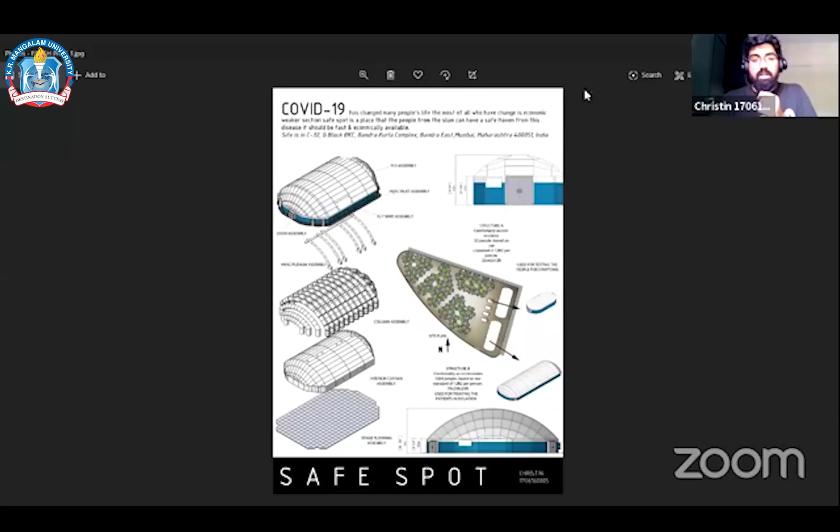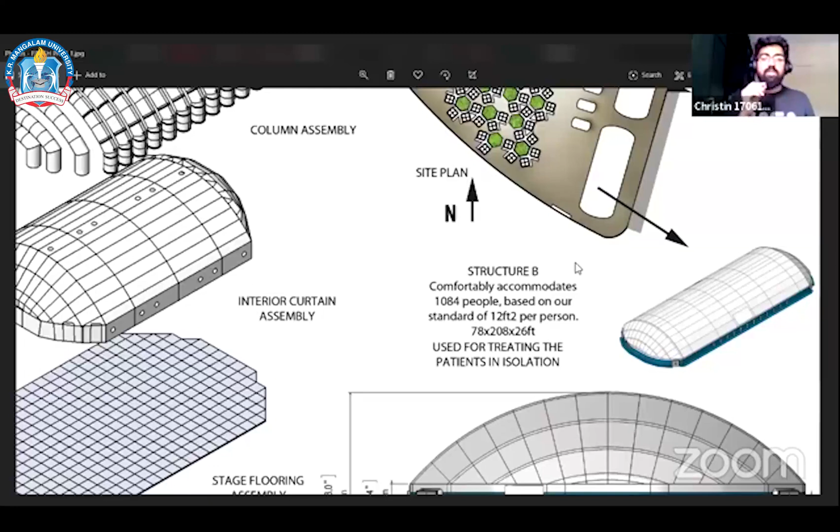This particular structure, structure B, was created based on places like Air Force areas. It is a structure for hangars where planes come from, where planes are kept and used, and engineers work on it. And I transferred them into isolation chambers for people who are infected or tested and waiting for their results, so that they can get into the building.

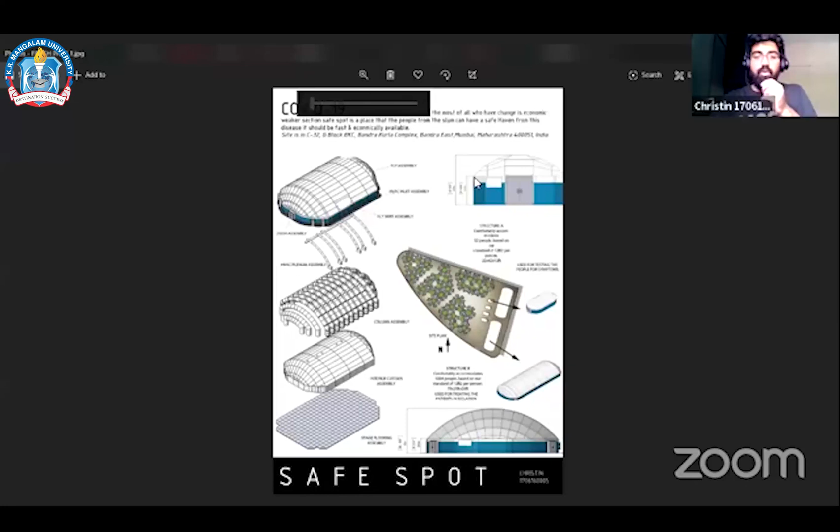I didn't have the opportunity to work inside such buildings, but I worked on another project, my residential areas. I have to say that these people don't have breathing spaces in between the buildings. So what I have done is create a courtyard and breathing places so that air can come through the buildings and between the buildings and go through the courtyard so that there can be ventilation in between. I have made a crisscross of towers in which there can be gaps in between, so that air can come through, and placing it horizontally is to create interactive spaces so that they can interact with each other within their homes as well.

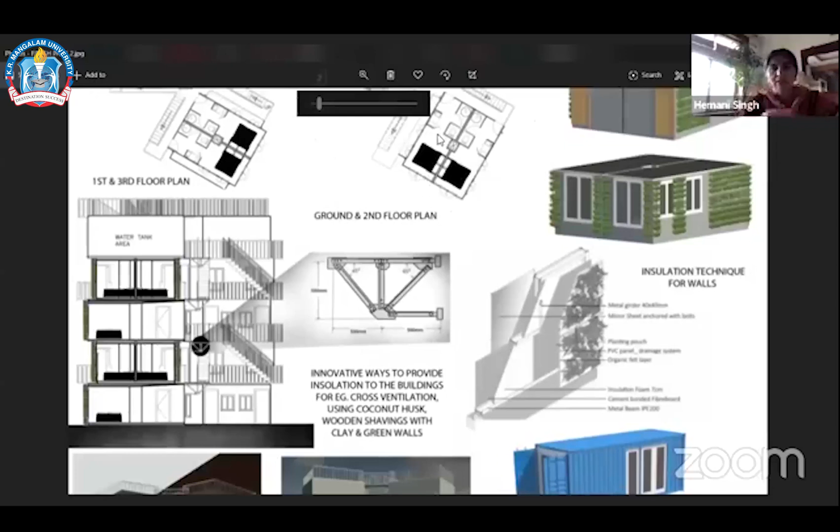Yeah, that's very good. Do you want to go on to explain the containers that have been put to use? The main problem is I should create a structure that is readily available, faster to create, and needs the least amount of effort.

So Dharavi is already near to a lot of shipping containers, so I tried to construct a building with shipping containers because of that. I've stopped myself from doing anything other than shipping containers.

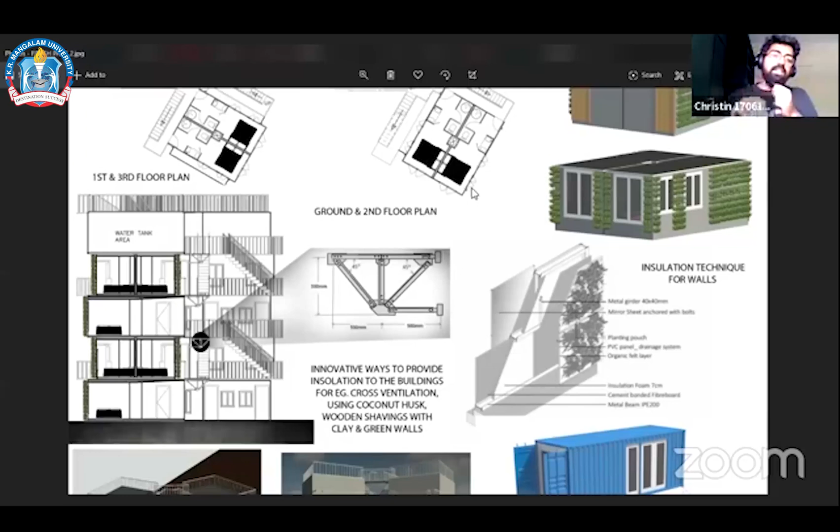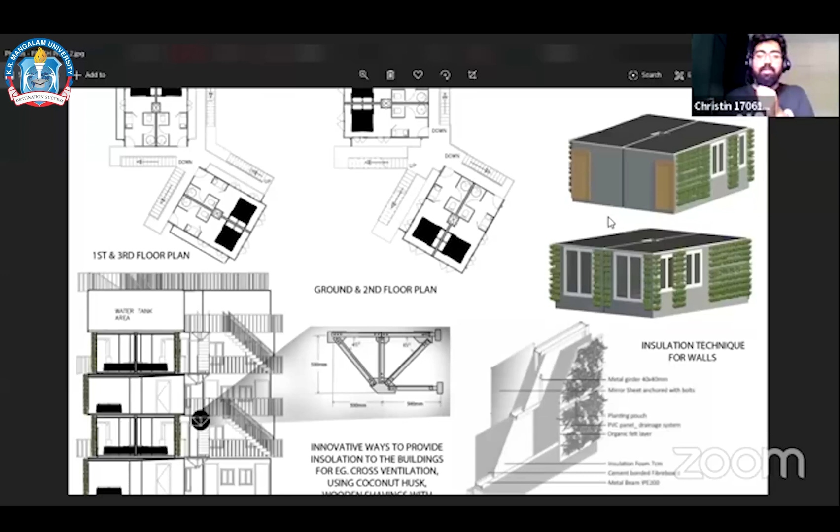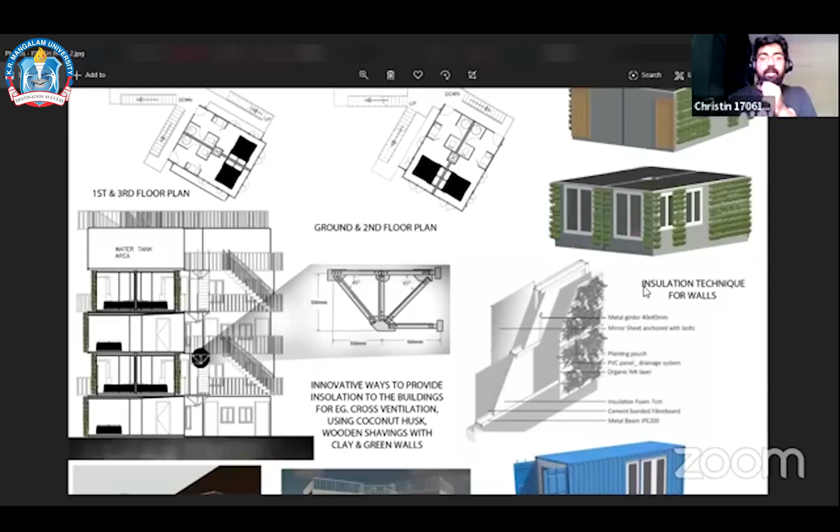...the shipping containers inside can be cool enough for people to survive. So I've given green walls, and mirror finishes inside so that light can pass through and illuminate the inside with the least amount of economical effort. As you can see in the sections, I have given a bed.

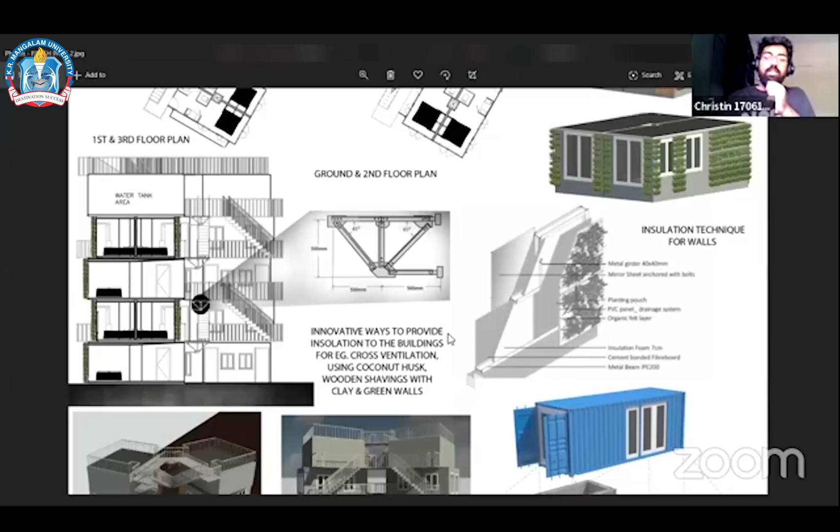It's a studio apartment with a washroom, kitchen, and bed. You can see the 3D. The foundation is important because I've given insulation on the roof. As you can see in this area, there's a little cavity in between with natural insulation materials in there.

We have to think about the foundation as well, because I'm creating a structure in a muddy area near a water body. We have to think about the foundation technique as well, so I've chosen this foundation technique so that it can be insulated in summer and hot times.

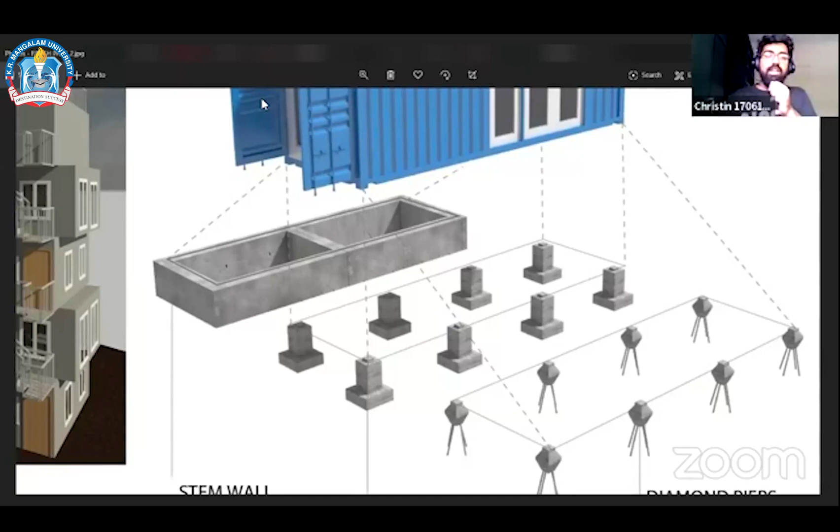Right, so do you want to zoom in on the plans and just show us how this 40 feet container is operating?

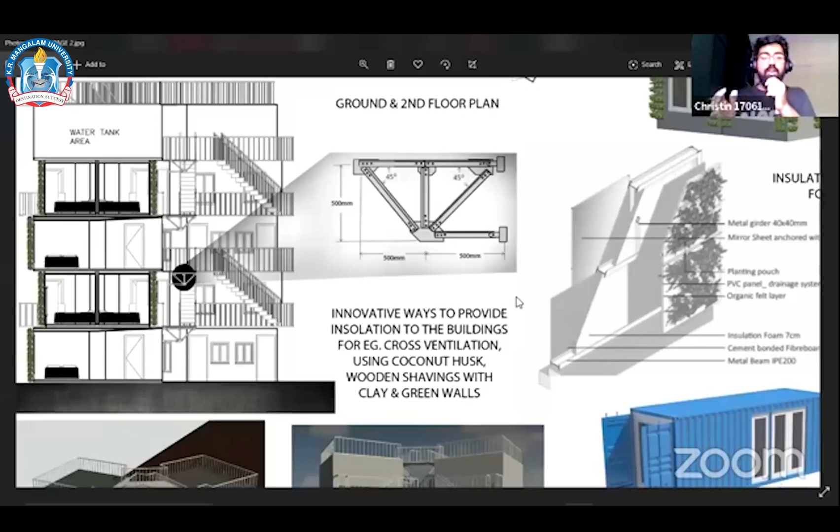Because of the prediction that this pandemic is going to extend for a long time, I decided this style of building would be more applicable for people of economically weaker sections, so they can live comfortably and isolate themselves safely.

The windows of the buildings face towards the courtyards so they can have interactive spaces between them. Anyone can interact, play, or sing a song, anything in between them, and look at each other with the facility of being in their own room and safety.

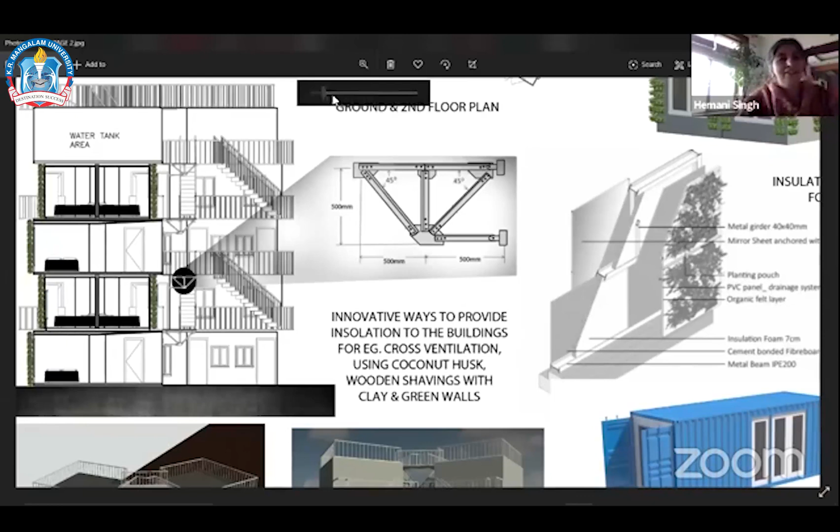Thank you, ma'am. Looks very good. I can see the green walls, the effort you've made in insulation of these containers, and how you've tried to economize space while giving as much open space and privacy within that space. Yes, it does look like a great design.

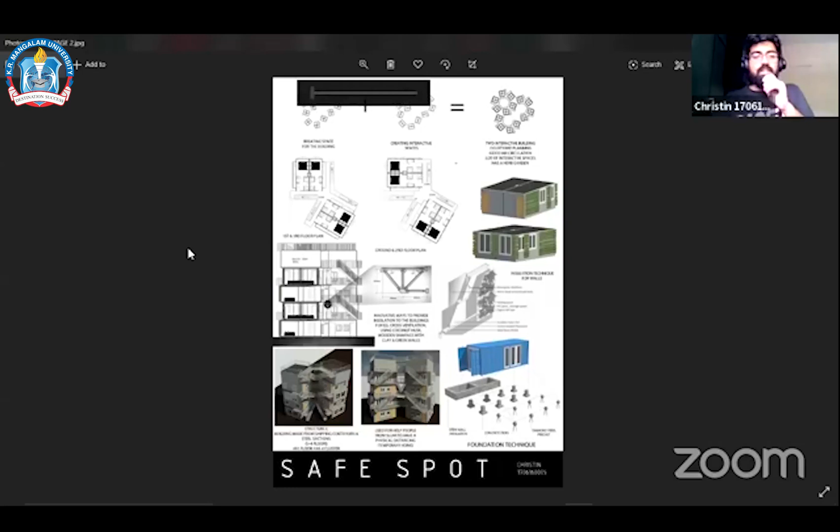Traditionally we use columns and beams for courtyards. I created a truss for supporting the courtyard, so that it can look like a hanging courtyard, a hanging corridor. I've given a truss kind of situation there.

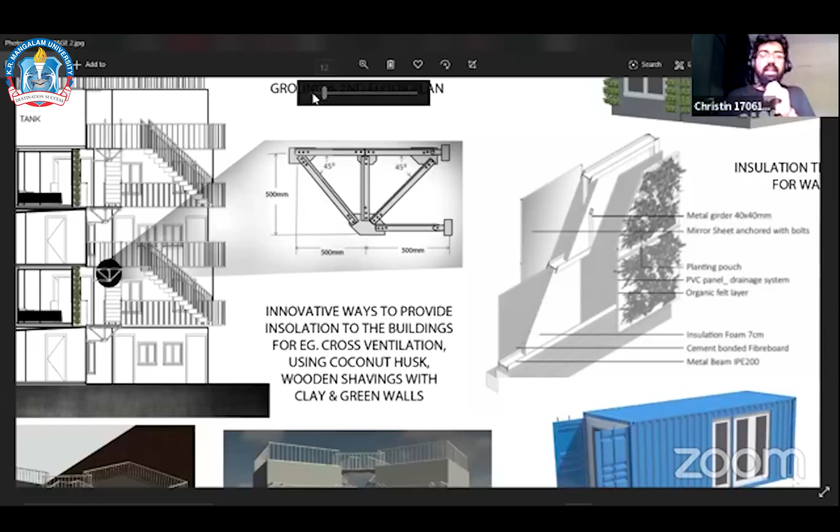This was a small building for a weaker section, so I could not do a big kind of effect there. But what I did, I think it would affect the people there positively, and thank you for that.

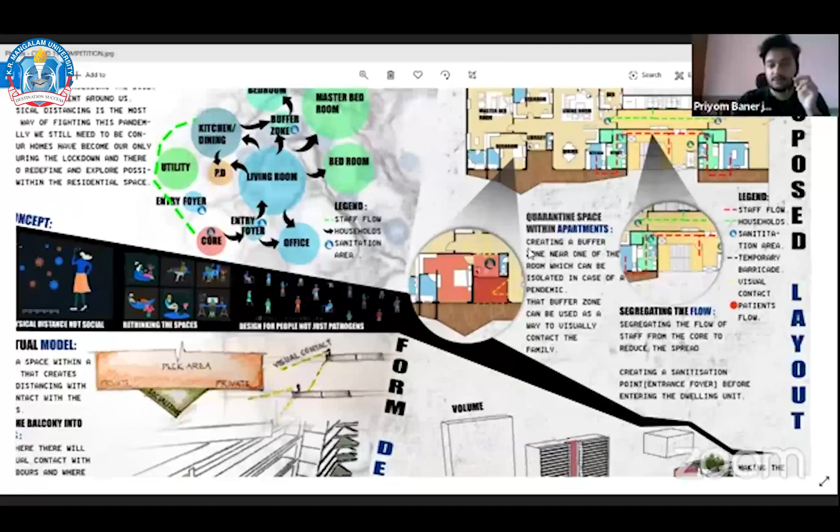So as you can see in my plan, there are a lot of buffer zones and segregation of the staff flow. These buffer zones are actually a normal entrance foyer of a house, that can be used for a very normal purpose.

During a pandemic situation, these areas can be used as a sanitization point. We can create temporary barricades and sanitize people from there. The main concept is to create buffer zones.

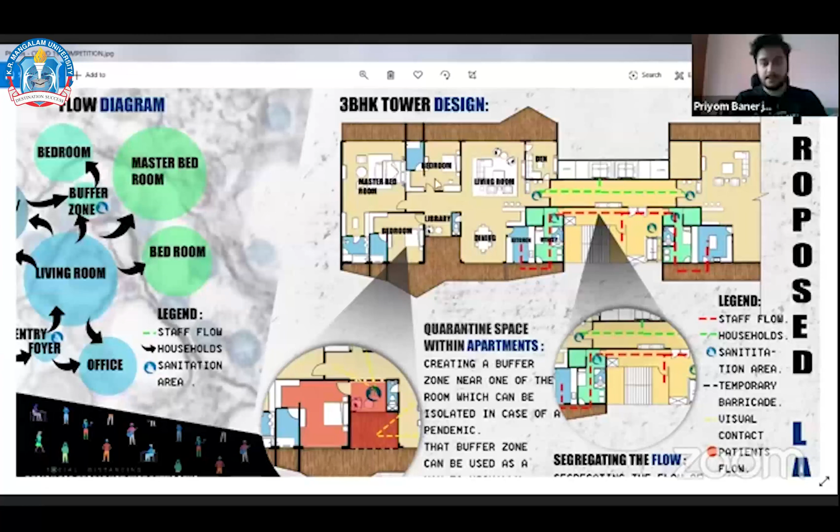So as you can see, we can also provide quarantine spaces within the apartment by reorienting some spaces, like in my library area, like this house, the bedroom space. This is a normal case scenario when there is no pandemic. This room can be used for a multi-purpose area. But what if we need to quarantine someone?

My third main concept is designed for people, not just pathogens. So we need to make it people friendly. We cannot treat the person like a virus. So that buffer area can be used for the person who is being quarantined to have a visual contact with the family. The main concept is to create a visual contact with a physical barrier.

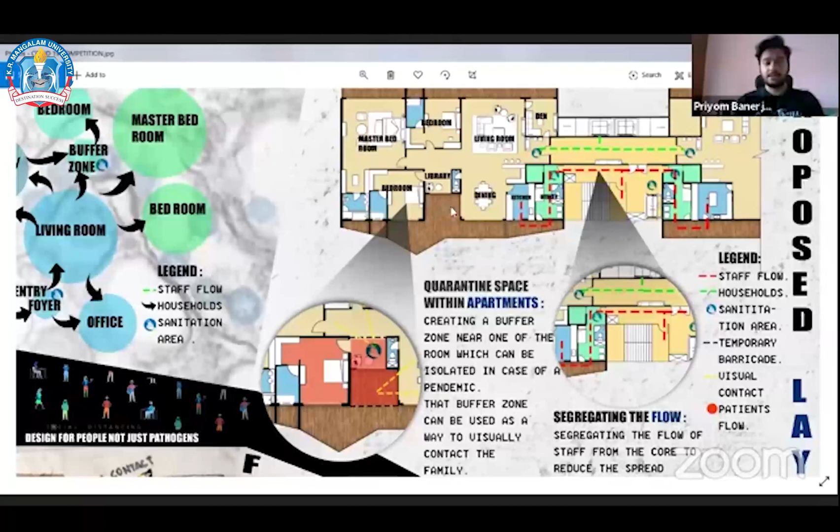So when we are within the apartments, as you can see in the plan which I've blown up, the dotted line shows the temporary barricade, and the yellow line shows the visual contact with the families. So he can have dining time with the family with a physical barrier, but with a visual contact.

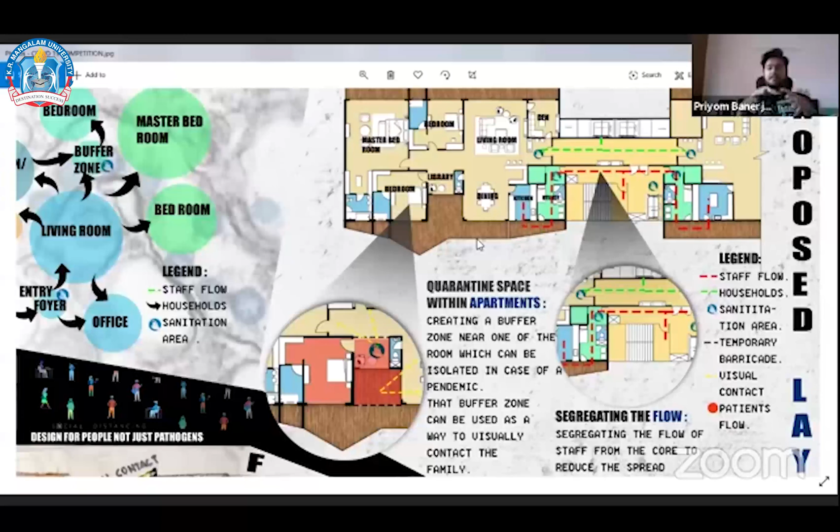Now, when we are living as a family inside a house, we should have a visual contact with the neighbors as well. We should know what they are doing. So we can do that while staying in the balcony. In a balcony, we can either stagger them or do anything, but staggering them will create a lot of privacy issues in the balcony.

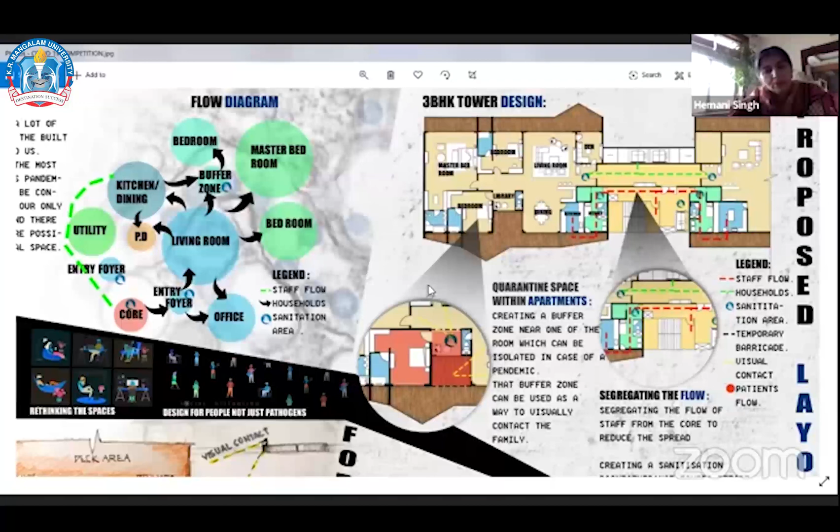Can you zoom into that area, the balcony? Yes, the 3D, yeah.

So this is actually the concept which I have used. In the balcony, I've created a private space so that people, in a pandemic situation, would love to use the socializing deck.

In a normal case scenario, we have a lot of socializing areas where we can go physically and socialize. But in a pandemic situation, we can't do those things. So while staying within the housing facility, I have created a balcony that's flexible, that it will have a socializing deck from which you can go and socialize with the other neighbors.

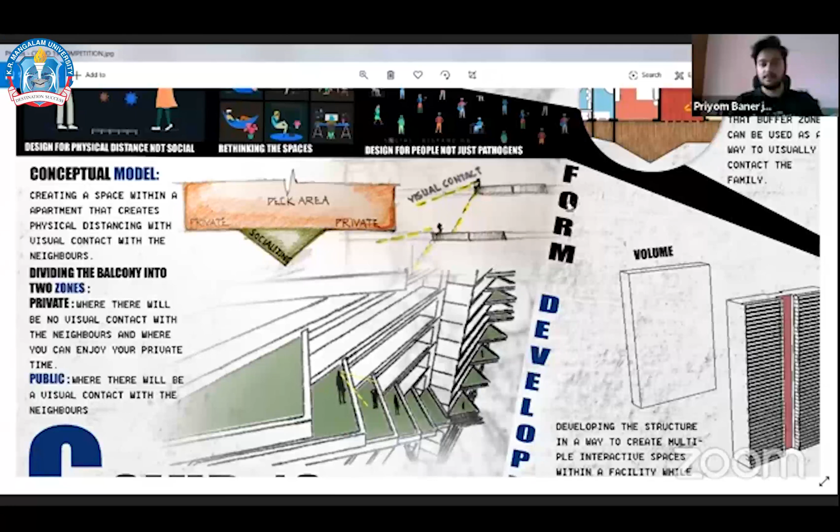So when you're in the private space, nobody is able to see you. But when you're in the socializing area, you will have a visual contact with your neighbors. These kind of flexible plans we can create, and the main concept is to create flexible plans so that it can be pandemic friendly, not a design which is particularly for the pandemic.

So following that concept, I have made a conceptual sheet like that. It looks very good. I think what's very important here is when you say this design is for people and not just pathogens, right?

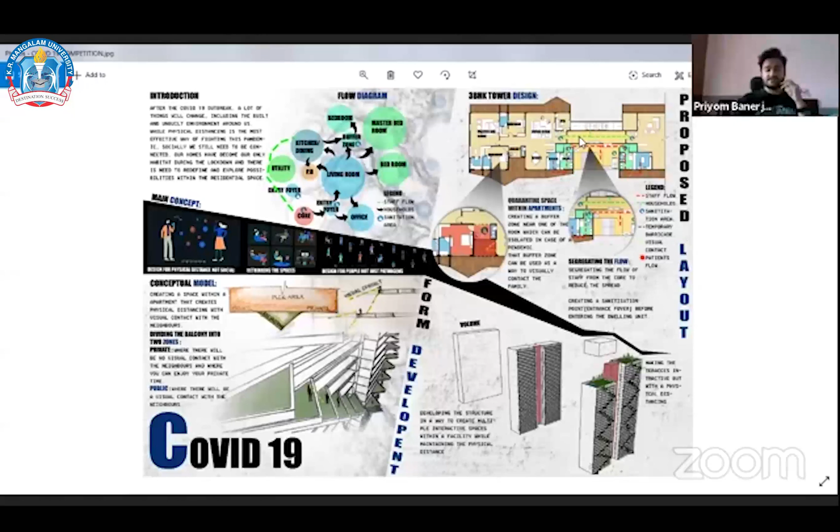Yes, so I think by creating these right spaces, you're giving people who are in quarantine or who are in isolation enough visual connection and social connection with their families, with their neighbors, without actual physical contact or without actually transferring the virus.

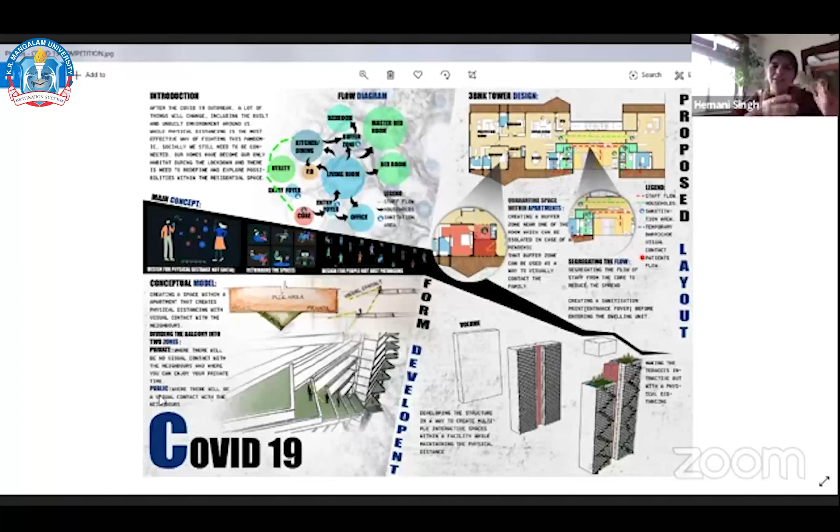So, yes, I think it's very interesting, especially the balcony and deck area. I hope everybody can see how a part of the balcony comes out like a deck, and it's staggered on every floor, so every floor people can have contact with each other.

Yes, something I think we've realized in this lockdown period, that for 40 days we are not able to see our neighbors. Even though we are in the same tower, a friend of mine could be just one floor above or one floor below, but I can't see them because our balconies are just stacked on top of each other.

There is no visual connection. So by providing this deck, suddenly I can see who's living above me, below me, who lives where, and at least from a distance we can see each other, talk to each other, and not feel isolated. I think architecture can do a lot of these modifications, these slight tweaks of design, and introduce a number of these things at the space level to make it easier for people.

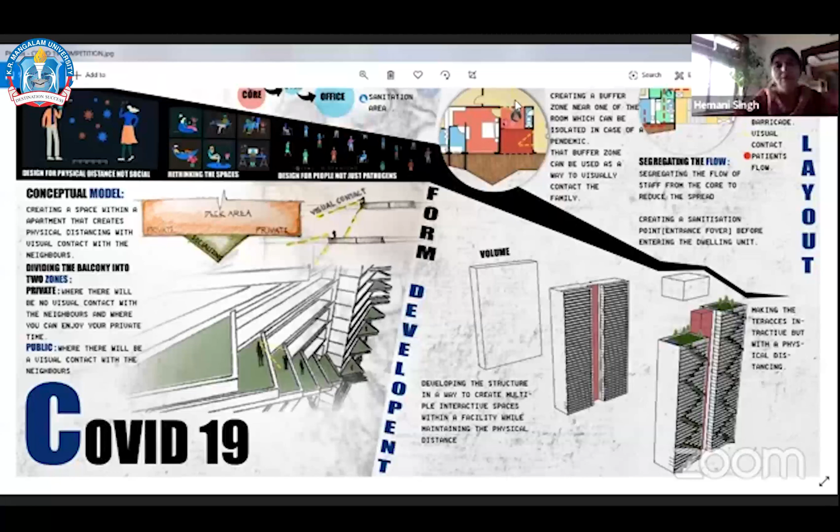Now I want to call upon Priyanka Dabra, and I think she's going to tell us more about an architectural solution to quarantine areas, to isolation areas, and how these can be created within an apartment without physically isolating a person or making it a depressing solution. So Priyanka, let's see your concept and you can explain.

Thank you, ma'am. As we all know, during this pandemic, according to the guidelines, we are being asked to maintain physical distance inside our homes as well. So keeping that in mind, I have created a mezzanine floor inside the apartment, which actually creates physical distance but doesn't isolate the person as such.

So the idea was to create a mezzanine floor which is self-sufficient in itself. The lower floor in the apartment has all the other areas like dining, kitchen, bedrooms and master bedrooms. But the mezzanine floor in itself is self-sufficient because it has a bedroom, a little living space, a pantry, and a balcony as well.

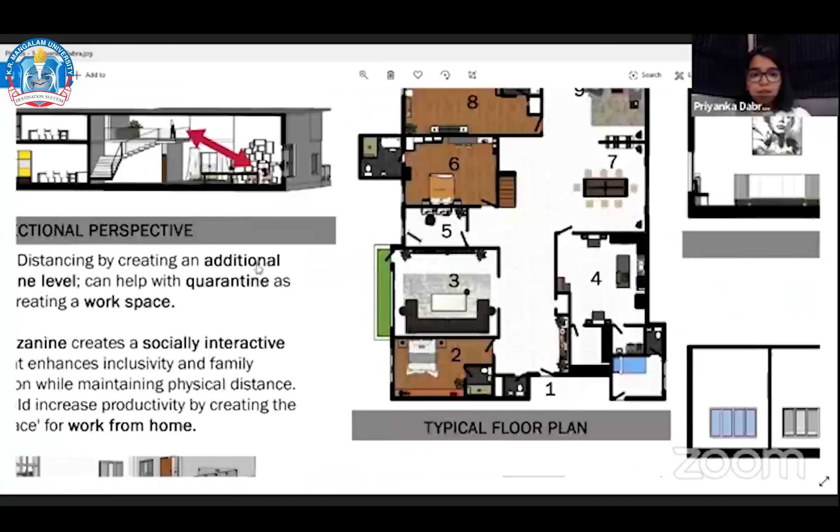So the mezzanine can be used to create social distancing, and just in case the person is infected, that infected person can live on the mezzanine floor and not feel isolated. They can still feel connected through visual connection, like you can see here. This is the railing of the mezzanine floor, where the person is standing and they can actually talk to the person on the lower floor who's sitting in the dining area. So that's how they can still feel connected while maintaining physical distancing.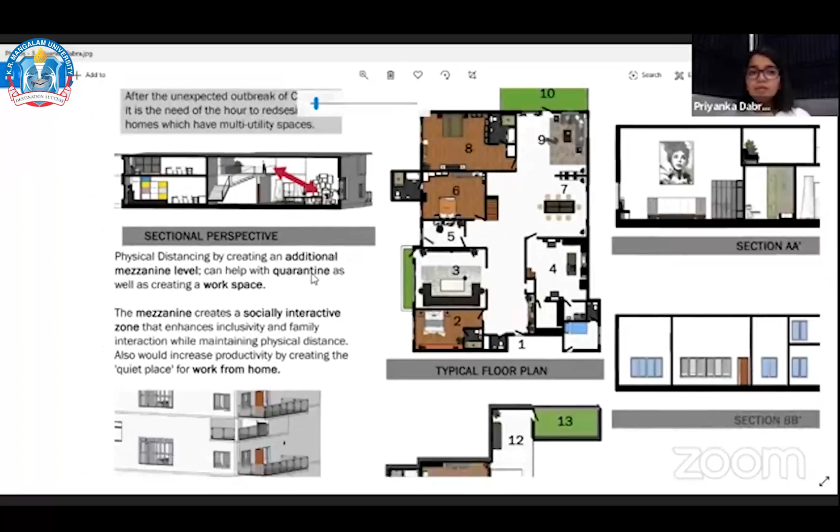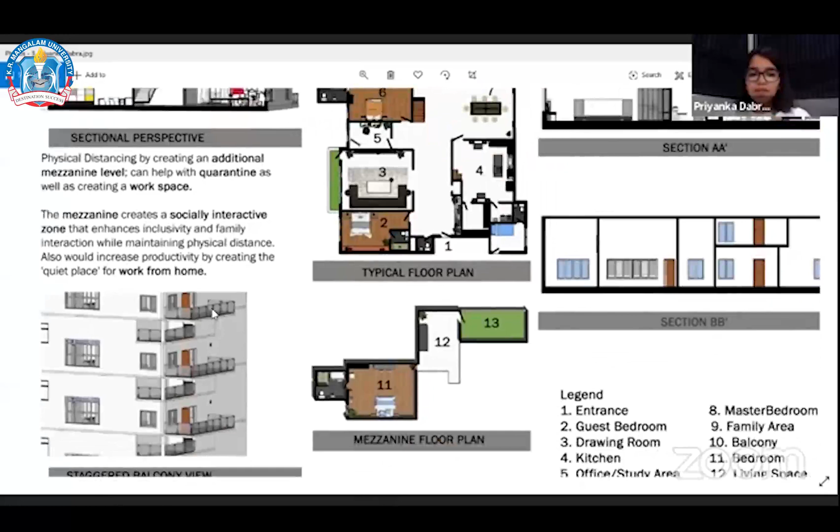And when we talk about isolating the person who's infected, it doesn't mean we have to make them feel alone. So I have tried to make them connect with the family as well as nature. For that, I have given a balcony on the mezzanine floor as well. This is the balcony on the lower floor, and this is the balcony on the mezzanine floor, which helps them connect with the neighbors, with their own family, and with nature as well, so they can still breathe fresh air and feel good about themselves even while isolated.

So that's the idea, but it doesn't disturb the privacy of any other apartment, because the staggered balconies are not one above the other, so that also addresses the issue of privacy.

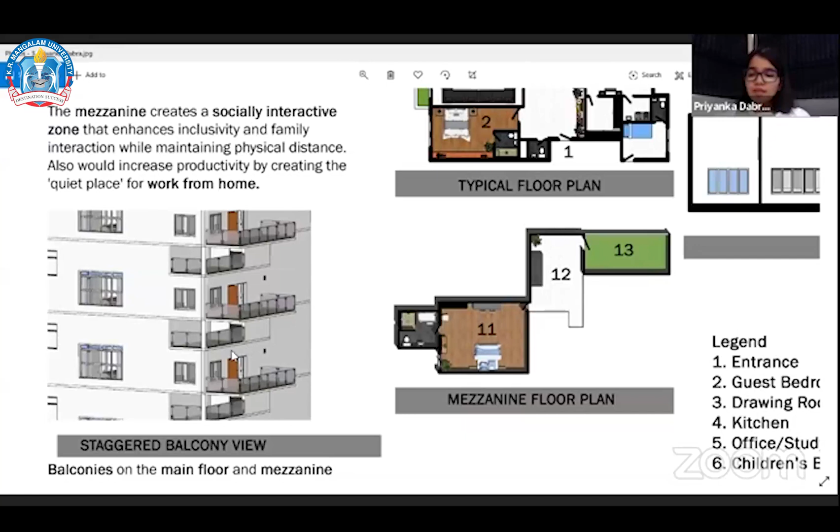And just in case they have to function regularly in normal life, the mezzanine floor can be used for a children's play area, or if nobody is infected at their home and they are just living normally, they can use the mezzanine floor for working from home, because it can be a quiet place where they will not be disturbed, while a lot of things happen on the lower floor. So they can maintain both simultaneously.

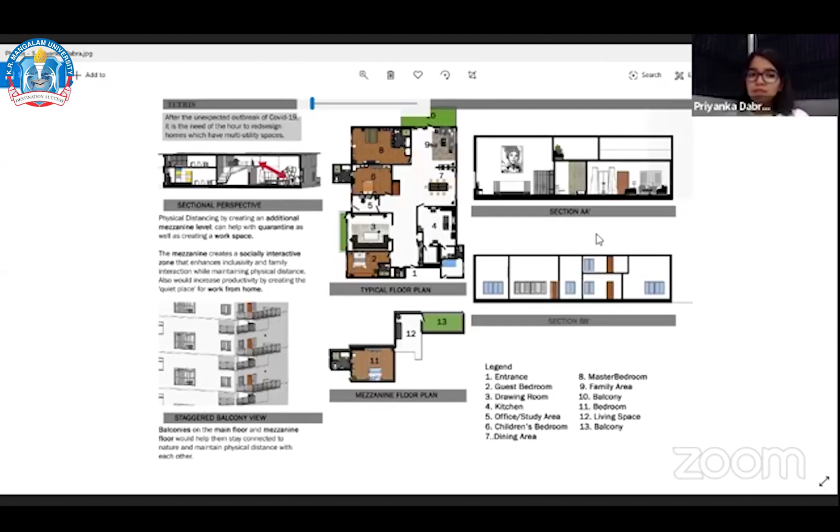I think architecturally this is a very important and interesting way of segregating spaces, creating level differences. These have always been used by different architects, and it's a powerful way of dealing with space. Priyanka, did you tell us how under normal circumstances this mezzanine will be used? Yeah, under normal circumstances it can be used for a children's play area, or in case they want to isolate themselves to work from home, or just to have a quiet place, their own time, so they can go upstairs and stay there for a while, because it's isolated but still connected.

I think with this pandemic, work from home is going to be the new normal, and that's what we hear people saying around us. In that case, this mezzanine becomes a very interesting space, because it's quiet, isolated, and you don't get disturbed by people in the house. What I find very interesting about this mezzanine is that it's complete in itself. It's got a sleeping space, a living space, and most importantly an outdoor space. These are things an individual requires, especially if someone is under quarantine or isolation and needs to be on their own for say 15 days or even longer, then this space is complete in itself.

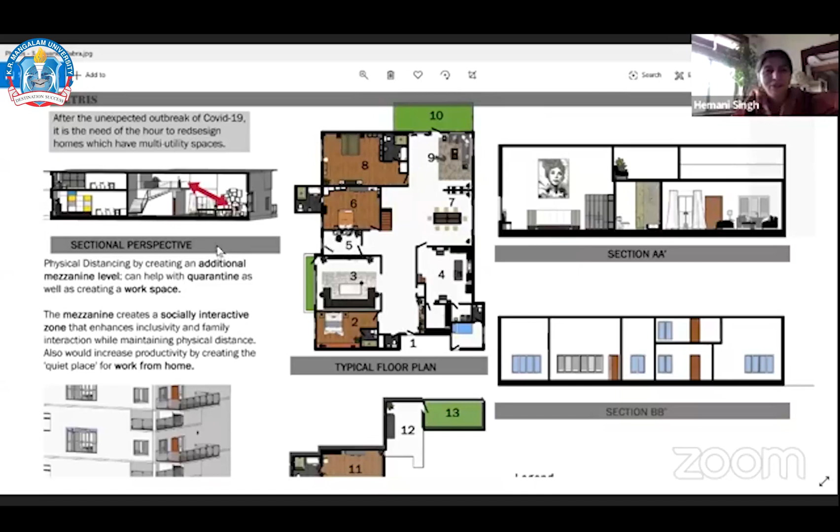And when they come out to this living space, I can see that it has railing around it, so there is complete visual interaction between that landing space and the dining room below it. And also from the bedroom, maybe on this side there can be windows to connect. So yeah, I think it's a great option.

As architects, we always try to play around with levels, with 3D spaces, by creating these double height spaces. And now I think we have a new reason to use these spaces. Yeah, I think that's a very interesting design input also.

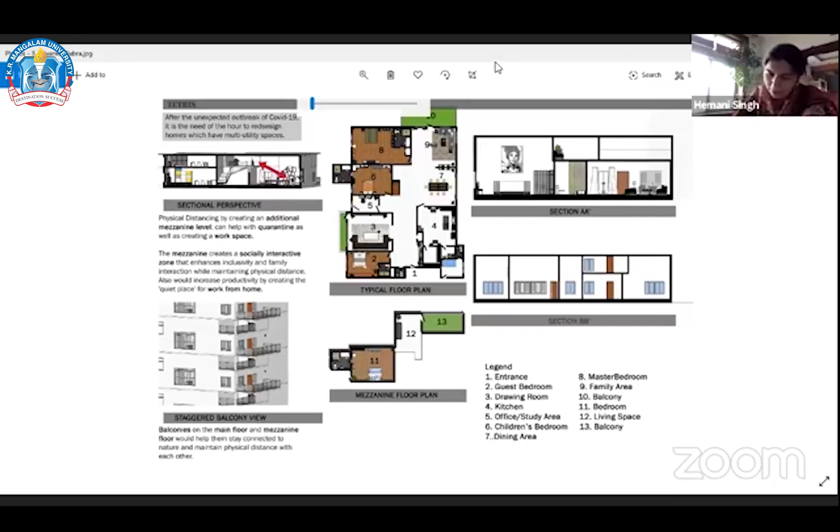Another very important aspect is that we are all at home, the whole family is at home. Our homes are now working as offices, as classrooms, as studios, even as gyms, or any kind of space, because our home is all we have at this point.

Another repercussion of all this is that there are lots of gadgets operating from home. Now that we're into May, and maybe June also, with all this soaring temperature, the ACs are on. There is a lot of load on electricity. And how do we deal with that?

As architects, energy conservation is very important. We should all appreciate the fact that energy still needs to be conserved. We still shouldn't be paying such high bills, or putting so much load on our backups and DG sets. So I'll now call upon Ritvik Vashisht. Ritvik has been thinking in terms of energy conservation and sustainability. So Ritvik, why don't you tell us what your plan is like?

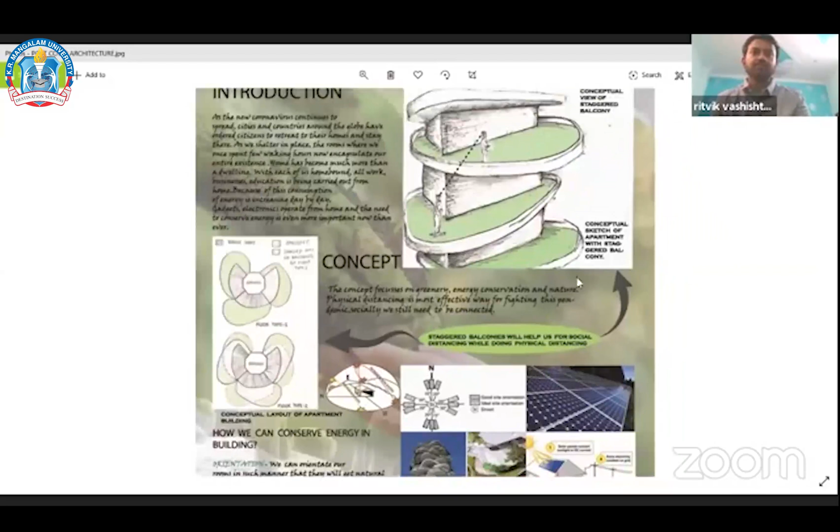Thanks a lot, ma'am. My concept for this design is conservation of energy and how we can create a contact of human beings with nature. So to conserve energy, I put some points. First is the orientation of the building. It seriously plays a major role when we create a building, because if we orientate it in a good manner, it will get natural sunlight and natural ventilation, which is seriously cost efficient.

The second point is the green roof. A green roof will insulate the whole building, and make it cool in summer and warm otherwise. If we provide such things in our building, first it will be aesthetically pleasing, and second it will provide insulation and cooling naturally into the building. We don't need other sources for that.

Second thing is the green balcony. In apartments we don't have a proper terrace, we just have balconies through which we can go outside and see our surroundings. So in that case, we can provide a green balcony, because as we're coming into June and July, lots of heat will come, these are the hot summer months. So in that case we will utilize lots of ACs and coolers, so we can use the green balcony instead.

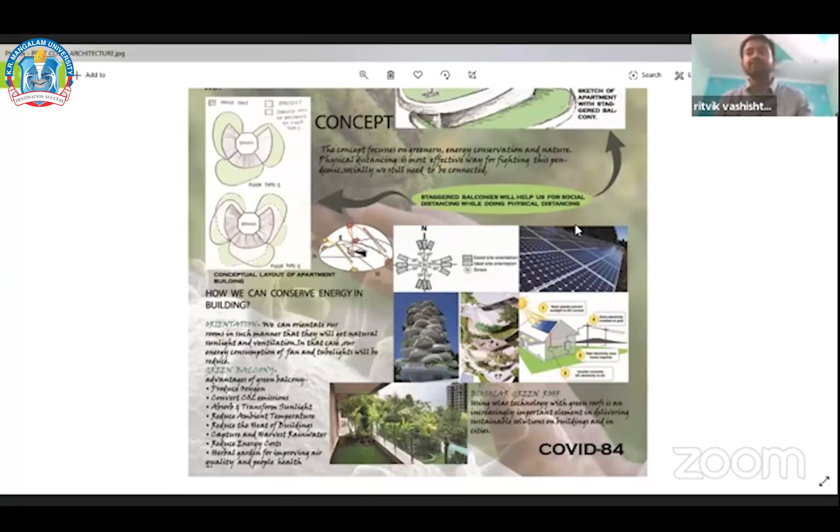And the last thing which I am giving is the jali work. As you know, it's an ancient beautiful element of Indo-Islamic architecture, and now it's also used as a natural cooler, because when air comes through those holes, it compresses the air and makes it cool. The velocity also increases because of that compression, so you get natural cool air from that as well.

So these are the points which I'm trying to put in this design, so that my building will more easily conserve energy naturally.

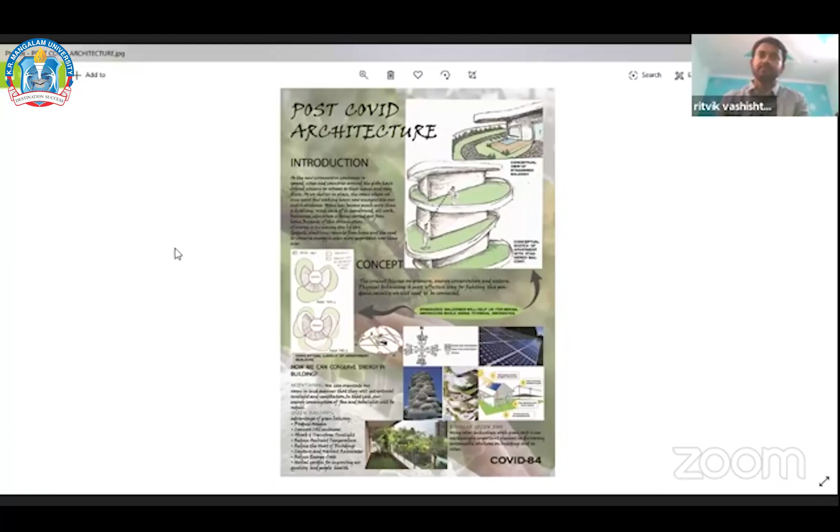Very good, I think we could see a lot of these things in your poster. I can see the green balconies, the green roofs, and how in this layout you've tried to put three apartments together with common walls. And then there are solar panels, and these large terraces which can also house solar panels for each of the apartments.

Nowadays, if we talk about nature, lots of people do not have a proper balcony. But if we provide such things in the apartment, it will be easy for every age of people. For children, it will be like a park, because it's huge and they can play over there. And for young people, they can enjoy the climate because it's already green with a huge balcony, so you can provide a swimming pool in that area and other things as well.

I think another aspect to this green balcony could also be the relationship with nature. The fact that every person living in apartments somehow feels that disconnect, because you are on higher floors, you no longer have that direct relationship with your garden or with nature.

So by providing that, I think you've also taken care of that relationship with nature, and that is also very important for the social well-being of a person. Especially in these lockdown times when we are just at home, I think that makes it very important to have that outdoor connection.

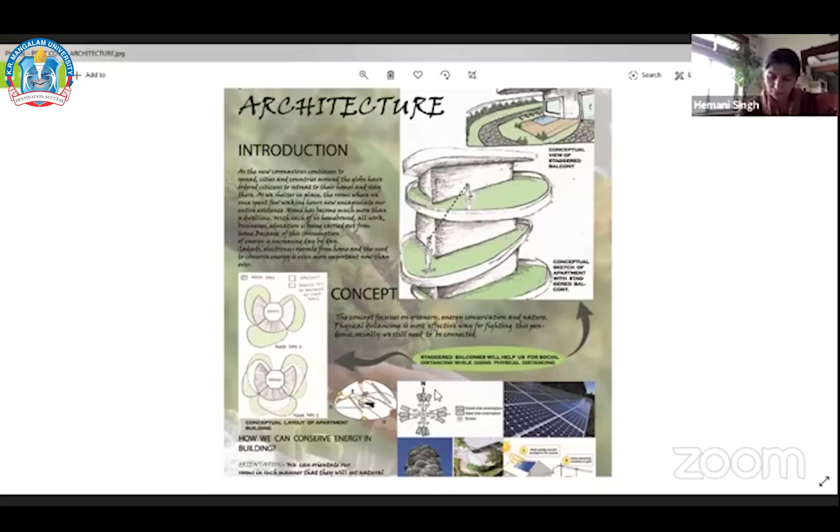So I think another very important aspect of all this is... let me just check, is everyone there? Okay, another very important aspect of these techniques for sustainability, and a very important aspect in all our housing buildings and towers, is the orientation, right? So orientation is very important.

Sometimes we see, for commercial reasons, people have placed buildings facing south, north, east, or west, and really that doesn't work. There are apartments that never get sunlight, and that's such a shame, because now with this pandemic, I think it's been quite proven that sunlight is so important for all of us.

So I think something like this has been addressed by Himanshu in your design. Something very special about orientation, right? Let's see, can someone share? Yeah, that's Himanshu's design. So my concept is based upon how people can maintain their social life and how they can interact.

I propose areas like balconies that stagger backward and forward. It's the apartment towers that are rearranged so they become a social zone where residents can interact while maintaining distance. I oriented the residences so they all have the same lighting conditions, and the staggering allows them to interact visually from their balconies while keeping a private zone that isn't visible to others.

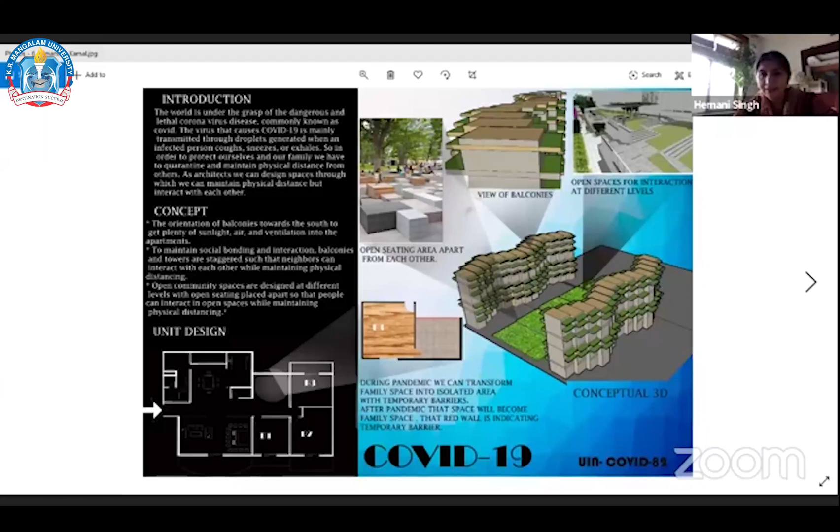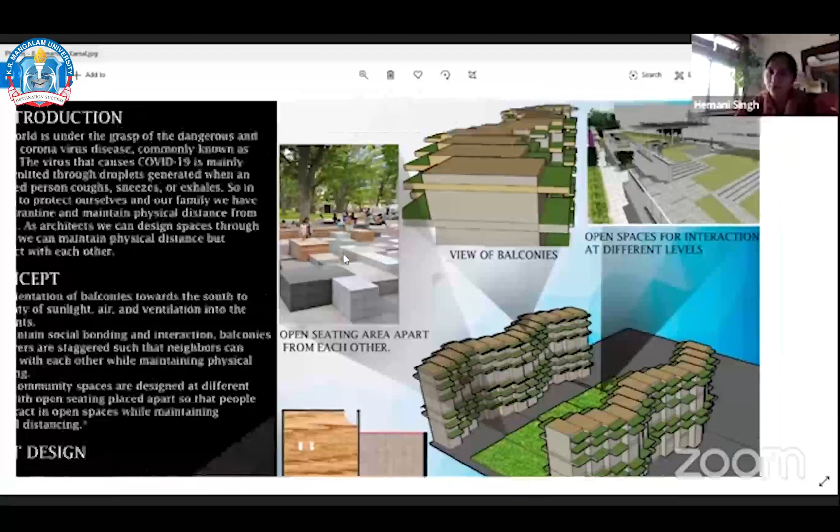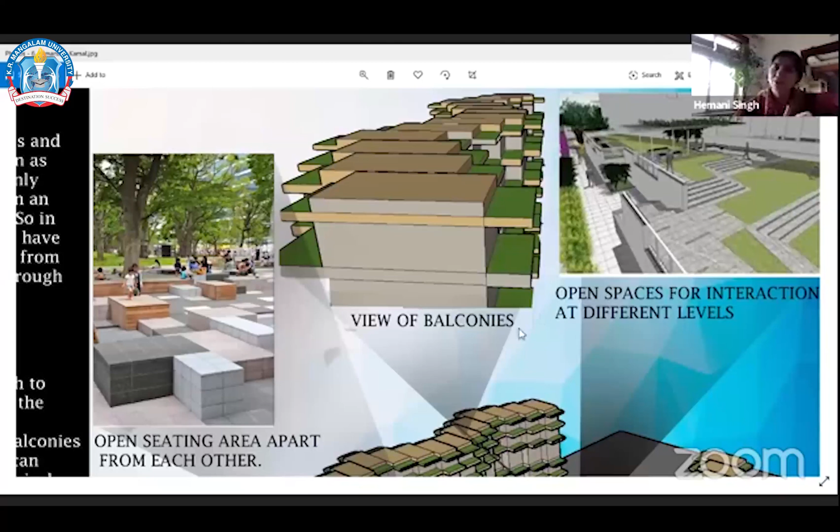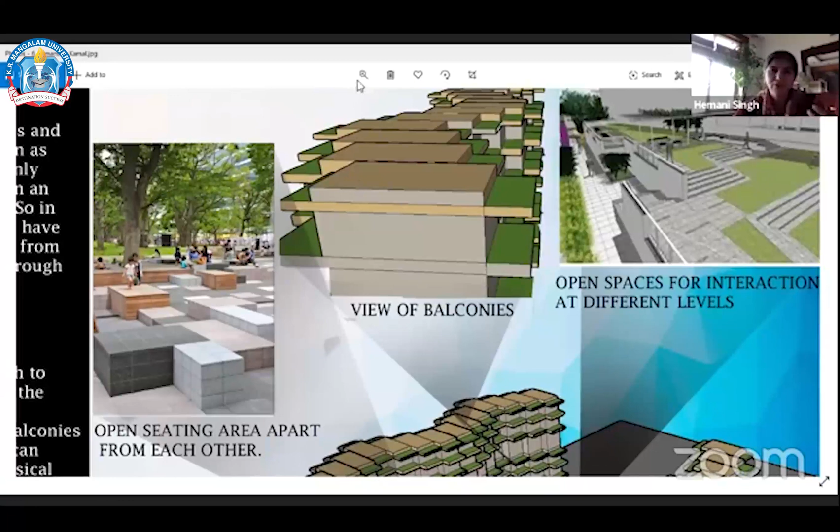The other thing is there's a large common green open space between the two big blocks, and because we have to maintain physical distancing, he's created different levels so children can play at different levels with some physical distancing maintained. This is a simple yet powerful way of conveying that we need social distancing and plenty of sunlight in every living space—it's no longer possible for some apartments to just go without sun. I think that's also a great attempt.

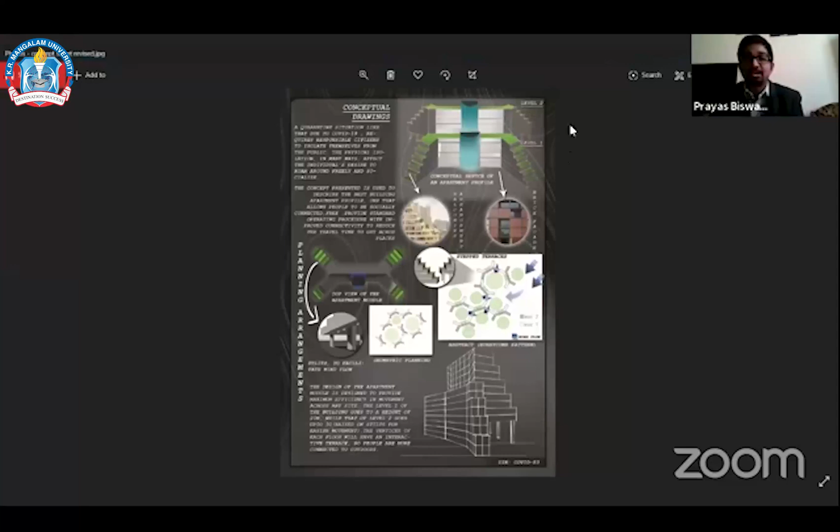As you can see, this is an apartment, and this is the basic module that I've created. It consists of step terraces and two portions, one facing us, one facing the opposite direction. The side facing us starts from the ground floor, and the opposite side is raised on stilts.

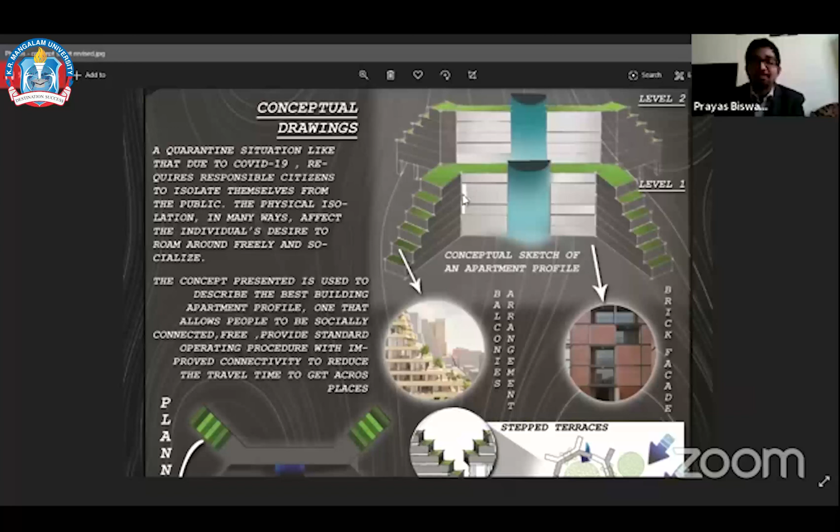This is to promote ventilation and circulation. The reason I did this kind of planning was to encourage people to move inside their houses to outside, while still maintaining some connectivity.

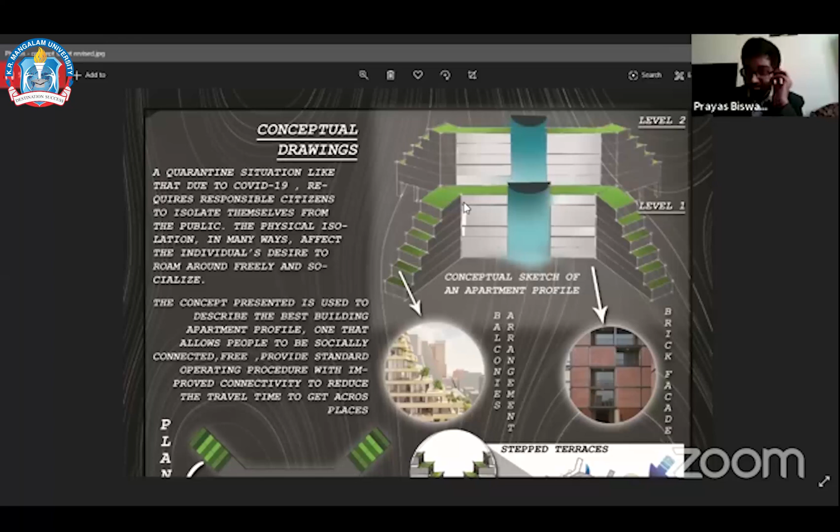Am I audible? Yeah. So I wanted to integrate the interior and exterior spaces and have open and closed areas within the apartment.

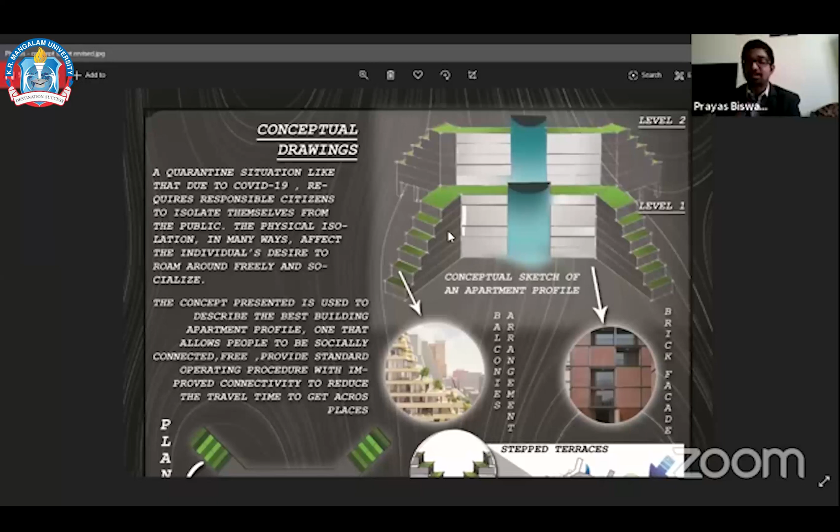After this, I showed some methods of arranging, like the abstract method and the geometric method. The most efficient form of planning is to have courtyards, though I think courtyards don't have good connectivity today.

If it's visible, I'd like to show courtyards. They improve ventilation and sunlight within the site, and they also zone out areas, so each area can have their own private zone.

So this is the advantage of the planning that can be created by this apartment module. This is the concept.

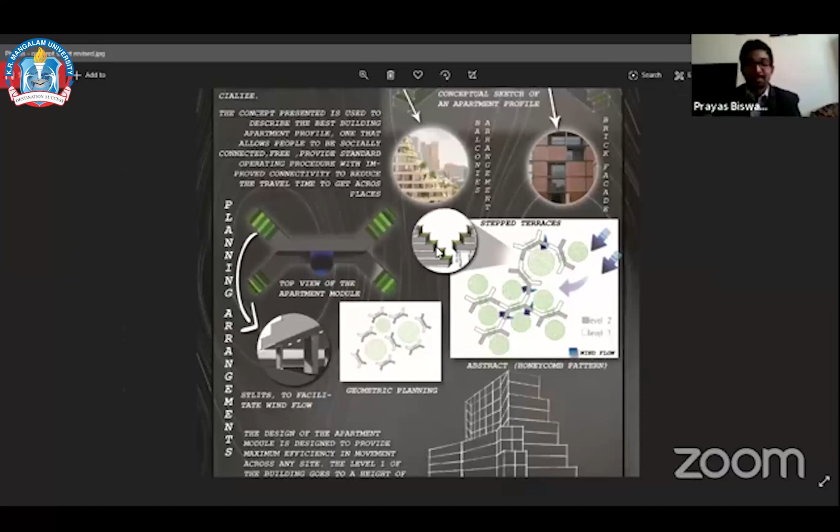I think I will explain some of these things that I know. Yes, I think your voice is breaking a little bit, so there is some discontinuity in this explanation.

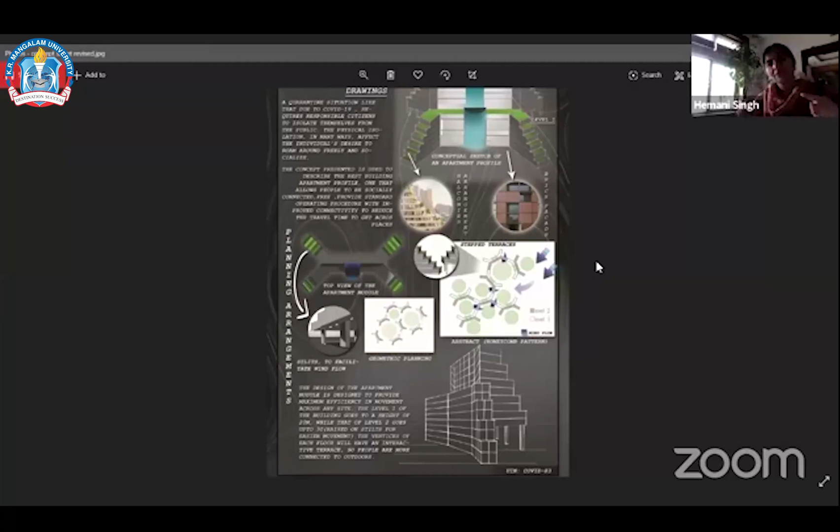What Prayas has actually done is develop a very interesting module. If you see this kind of two C-shaped apartment blocks, he's clubbed them together, and he's tried to develop a module that when these modules connect with each other, they form very interesting courtyards and very interesting community spaces. That's one very important aspect.

The other important aspect is that he's tried to raise buildings on stilts and provide these voids and step terraces in his building blocks so that there is a lot of wind flow. He's also tried to check the orientation of the wind flow and make sure there is enough wind.

As we are all aware, the COVID-19 virus stays suspended in the air for a while, and that's why it is so infectious—anybody can inhale it and catch the infection. So this flow of wind, well ventilated outdoor spaces and indoor spaces, are very important to our housing schemes now.

I think that's what Prayas has tried to put in his design. He's developed this module, and with this module, he's made the flow of wind a very important part of his design. The other part is these community spaces that he's developed with this design.

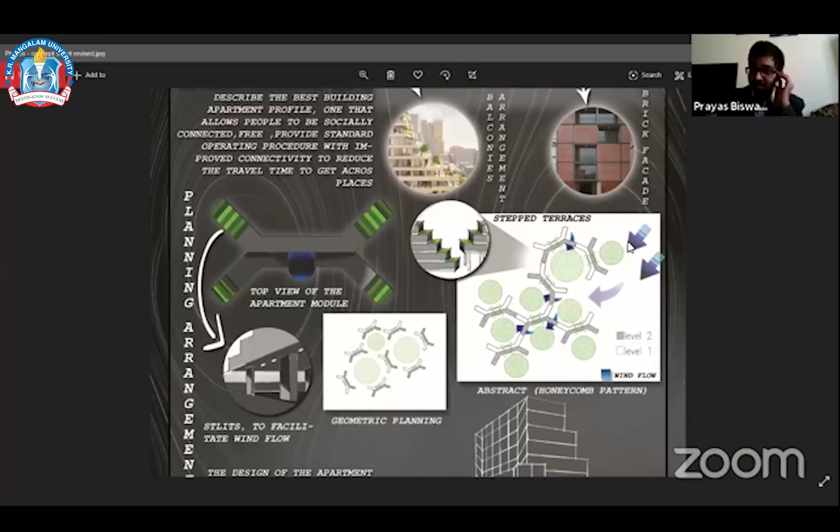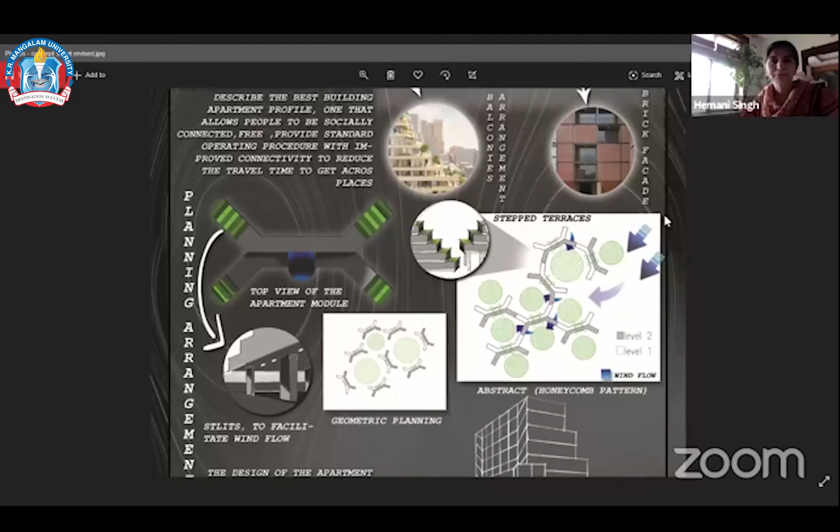Also, the air quality has improved a lot during the quarantine, so that's encouraging people to move outside. Thank you so much.

So we do understand the two aspects that you've looked at: the apartment design as well as the community space design.

Most of the students have already presented, and you will all notice that each one of them is thinking in a different way, but at the same time adding very positively to this post-COVID architecture thinking. I feel really very good about how COVID has triggered a lot of these innovative, creative ways of looking at things.

And rethinking and recalibrating our own living spaces, our own architecture. Sometimes, like somebody asked in one of the questions, they said one apartment looks like Tara Apartments. Yes, we are very, very strongly influenced by Charles Correa and his innovation.

Before we started this exercise, we looked at a number of architects who contributed very positively, especially to our kind of NCR environment and climatic conditions.

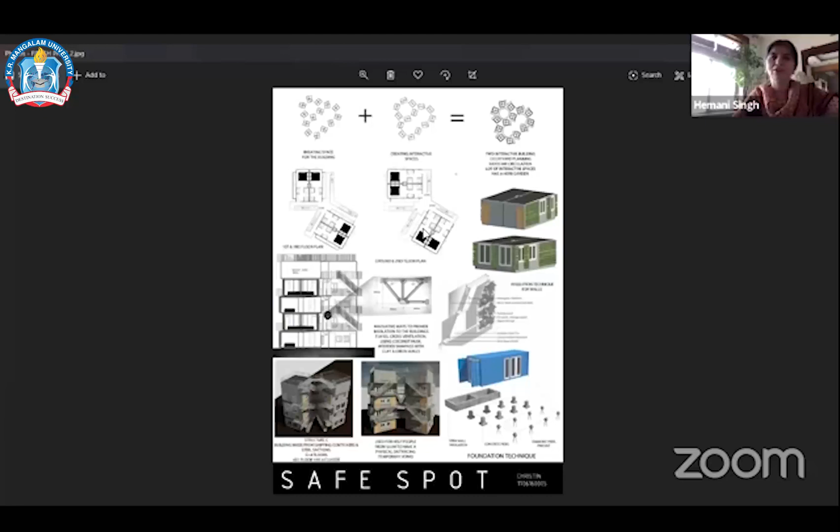Have you thought about giving workspace? While you've been talking about living space, recreation, and outdoor space, have you thought about giving workspace to these Dharavi residents? Because apparently they are also very productive in our economy. So how do you respond to that? Would you provide something separate? Would you think of providing it as part of the outdoor, semi-outdoor space? What else would you think of?

Thank you for the question. I would like to say that it is basically for the residential areas, but it's a bed, it's a mattress, you can remove it, and it is a multi-purpose area after all. I'm using a 6 meter by 2.3 meter size container.

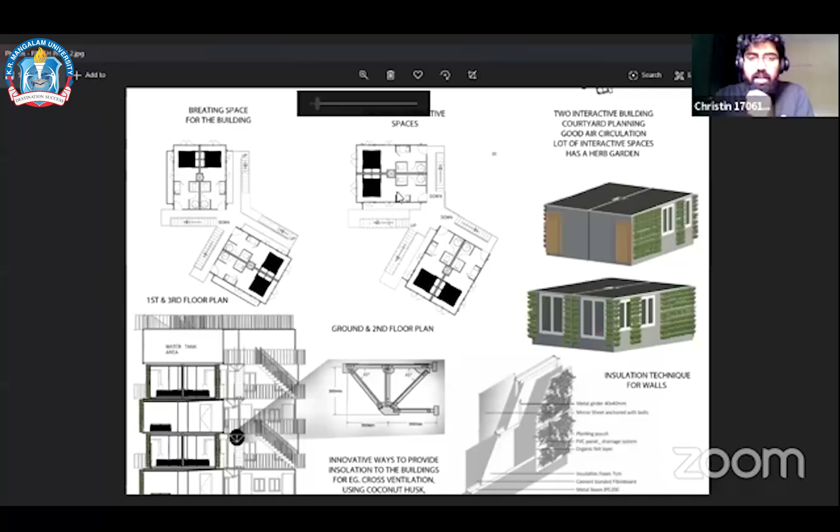Half of this, as you can see, is going in as kitchen slab and washrooms. Everyone has their personal washrooms. But the second half is entirely free, and it has ventilation and lighting for everything.

So apart from bigger machineries for textile industries, small machineries like for tailoring or something like that, we can definitely do such kind of activities in there. More than that, we have accessibility to a small balcony kind of area, as you can see here.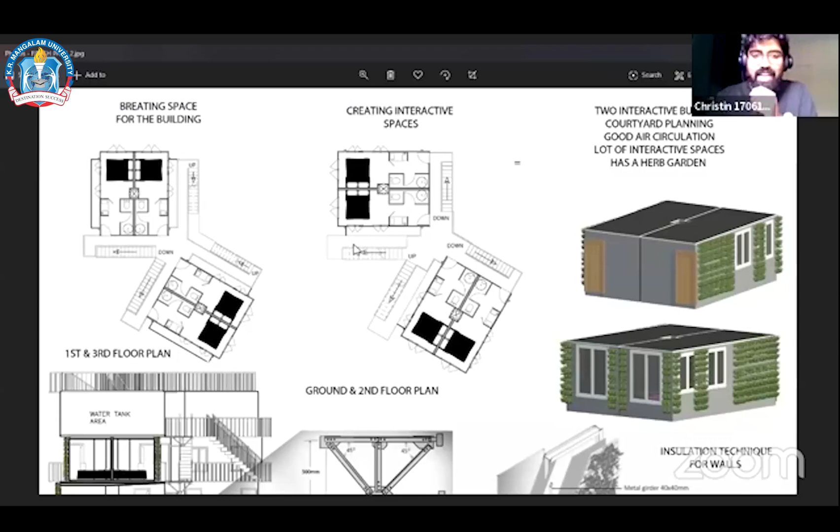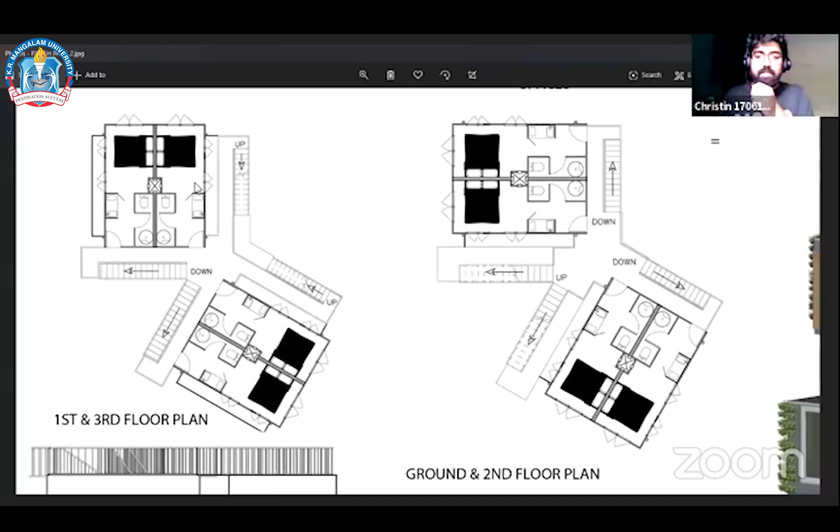This is provided for everyone. In this area, as you can see, they have all four of that kind. And this is for spaces like this, if they have too much storage space, so they can store something outside the building. And they have chajja over it.

That's why I didn't even create a building on the fourth floor, because there's a water tank in there and there is a natural chajja as well. I don't have to create an artificial chajja.

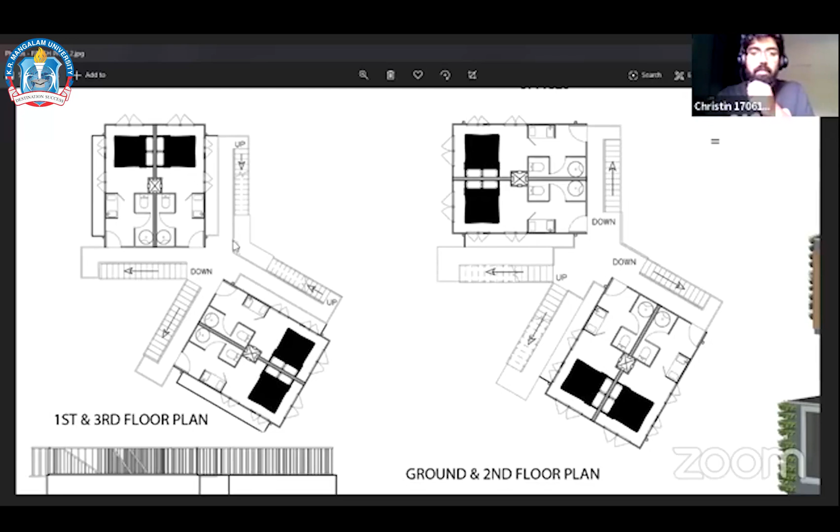I'd like to address one more question a person asked about fixings and everything like that. The doors are done - they're cutting out these places, the cavity, installing the frame, then the door, as we can see in normal buildings and stuff.

For corridors, what I've done is create a tensile structure, a truss with steel sections, so that they look like a hanging corridor. I didn't want to create a general corridor from columns and beams - that would be good and possible, but it's common. Creating something like this would create a much better effect.

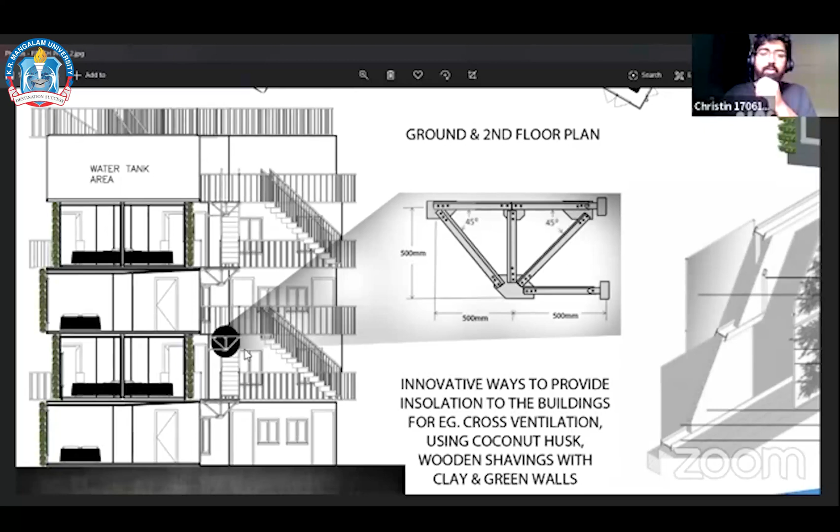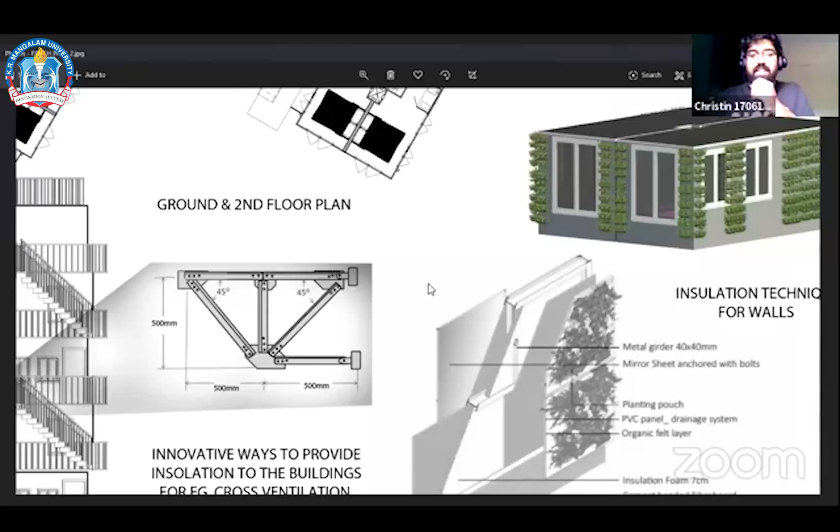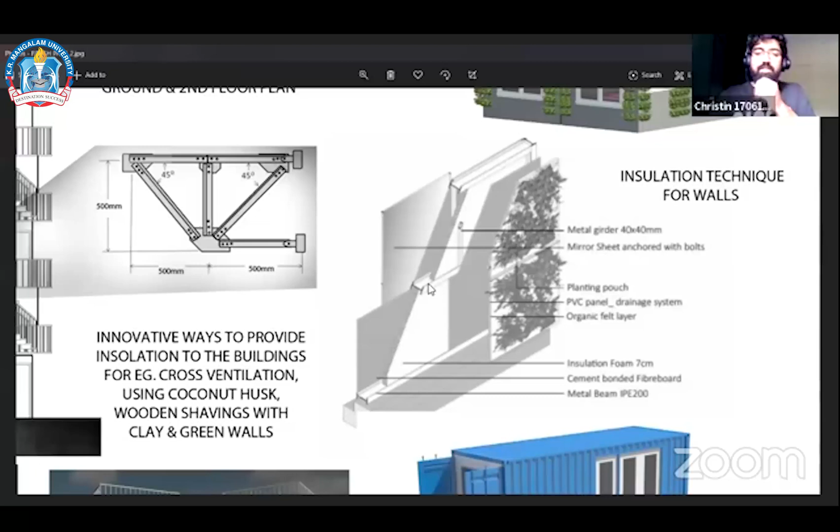I think I've covered what I've said so far. All the walls I'm showing have a wall which is reflective inside and green outside, and how I think of creating that wall is also designed there. There's a small 3D effect, 3D thing, what I've shown you here. Thank you.

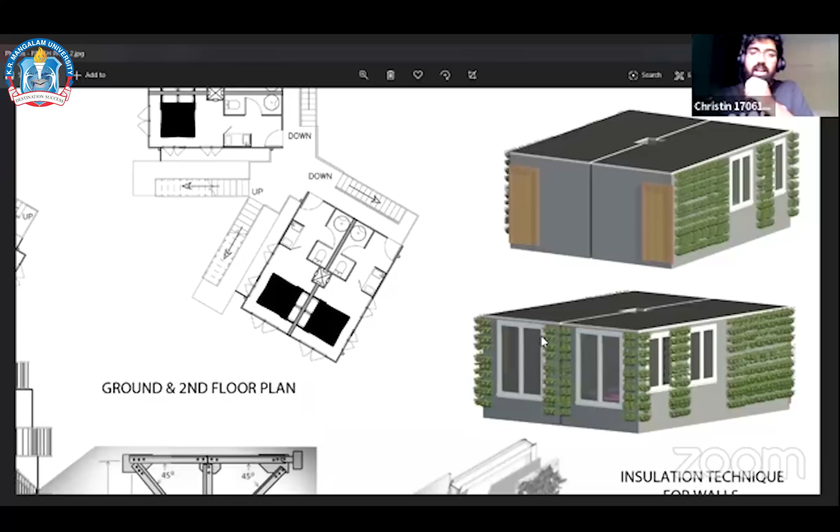Yeah, that's great. Okay, so I think what I want all of you to do is very briefly and quickly explain the architects that have inspired you. I mean, I have been talking about it, and there was also this mention of Tara Apartments. So just very quickly, maybe one-liners, and then we'll wrap up in case there are no other questions - there are some.

Okay, one more quick question we can take - it's about the movement or circulation of the helpers and residents in your apartment block. Priyam, are you there? We are all facing this issue right now, that the part-time helpers were not allowed, and now they are slowly trickling in. We know for sure they come from very densely populated areas, and their exposure to the virus is perhaps much more than all of us. How do we really take care of it architecturally?

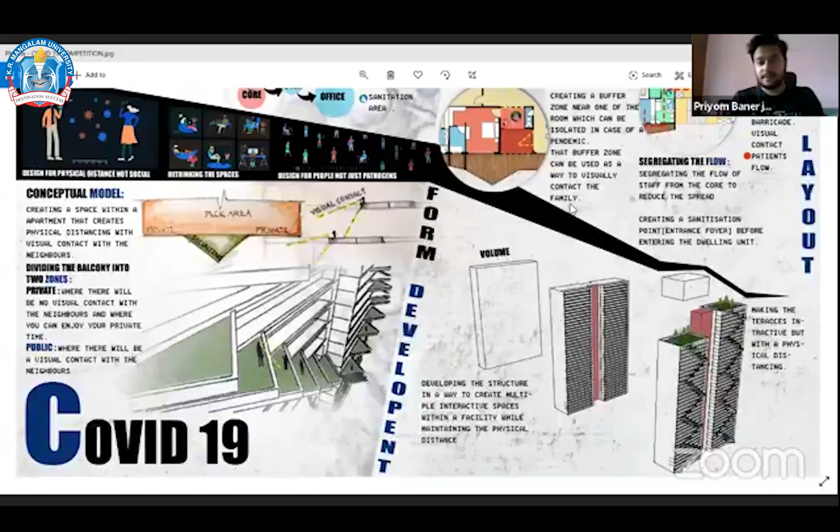As I've told, Keval mentioned before, it's very easy to create buffer zones before entering any facility. So in the main lobby, just two aspects - segregating the flow and giving a buffer zone - and providing all the shafts in that area, so that if there is any landline issue or any TV issue, the person doesn't have to go to the main entrance for it. He will come to this shaft, fix it, and then leave from the same area. And as you can see, after the lift opens, there is a sanitization point as well, so we can do that.

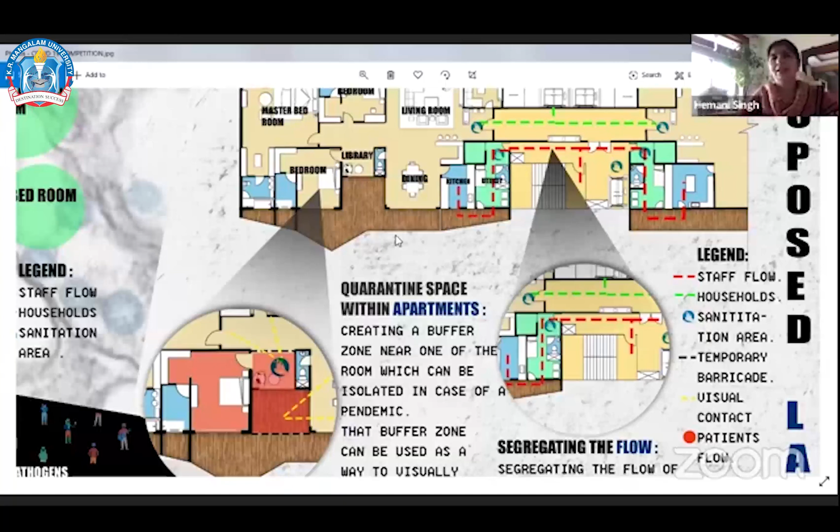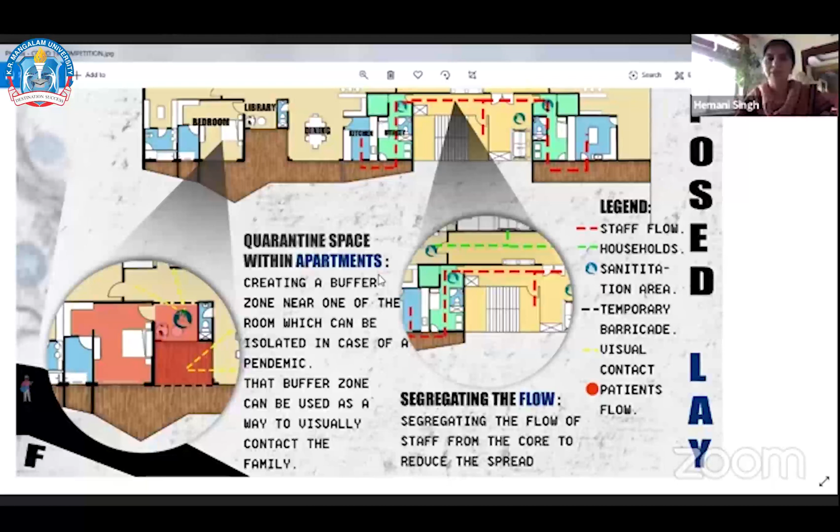So these kinds of segregation aspects we can keep in mind - a clear segregation here that we can see. Their circulation with the service lift, the fire escape staircase, and the entry into the helper's room is completely separate, whereas the main lift lobby remains clean and easy to use for the residents, right? Yes, yes, yes, I think that's also good thinking.

So just quick one-liners from all of you about somebody who inspired you, an architect who inspired you - maybe it can just be a single line. Prayas, if you have good connectivity, you can start. Prayas, I think you're still on mute.

Yeah, unmuted. The architect who inspired me is a German architect, his name is Ole Scheeren, and he has a lot of good buildings. The most memorable being Interlace, which is in Singapore. It has a similar division of spaces, and it looks like Lego blocks stacked on top of each other, and it's a skyscraper. It's quite interesting architecture. I think that is a very interesting block, and how he develops these modules by staggering them.

...and plays around with the open and built up spaces. Yeah, indeed, very nice. Exactly. Anybody else? Priyanka, do you want to go next?

Unmute yourself, please. So I was inspired by Habib Rahman for staggered balconies, as you've mentioned before. Back in independence, he brought the concept of a yard in the balcony. So that's what I tried to do on my mezzanine floor, so that people can stay connected and still have a connection to nature. So I was inspired by Habib Rahman for balconies.